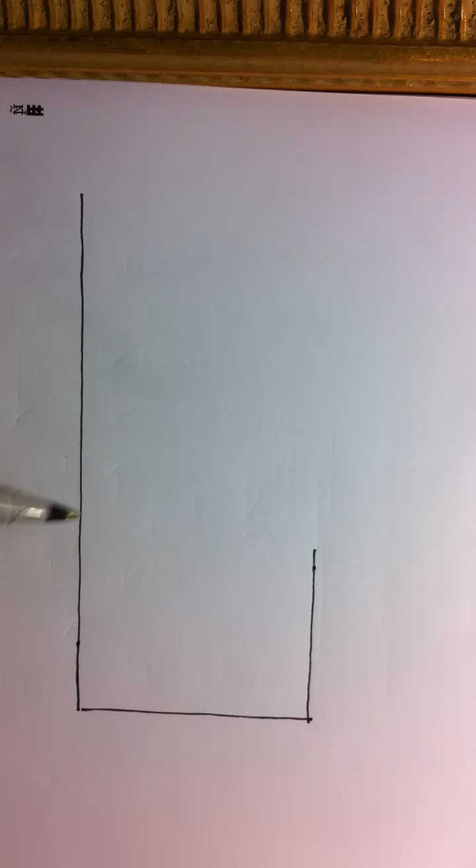Okay, imagine you're given this drawing in your exam. How far down can I go? This is all a bit dodgy, guys. I'm sorry about this, I'm trying to look at my phone, which is stuck on the wall, at the same time as I'm drawing, to make sure I don't go off the page too far.

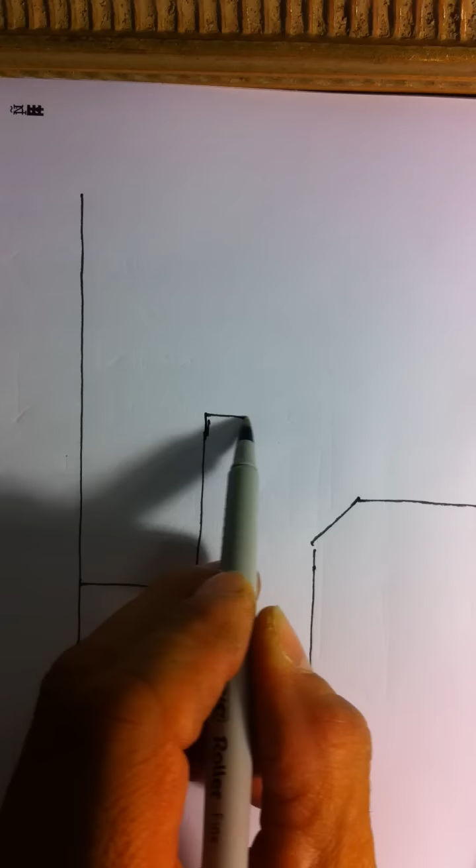There we go. Okay, so we might have an edge beam that looks something like this. Up a bit higher. Something like that. Okay, so you might be given a drawing that looks something like this - your drawing will be a bit straighter than this. Okay, so you're given that.

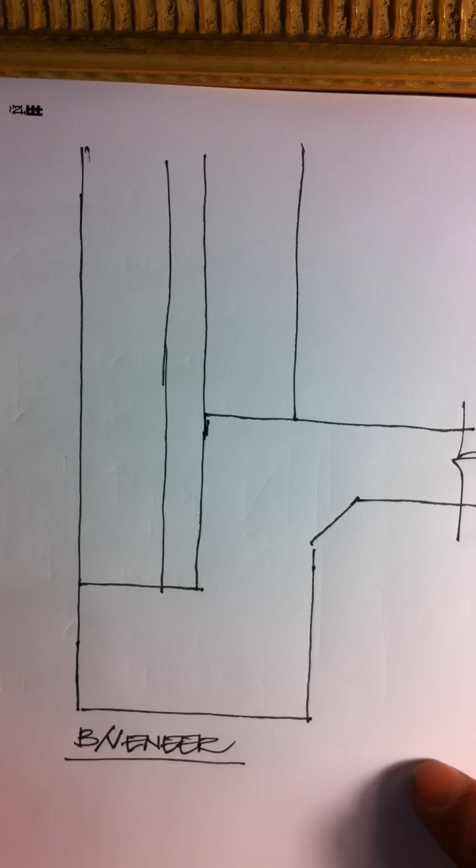And if we assume that's a brick veneer wall, what I'll be looking for you to do in your test is fill in the missing details. Okay, you may not have been given a finished ground level, FGL, and this one up here would be FFL, finished floor level.

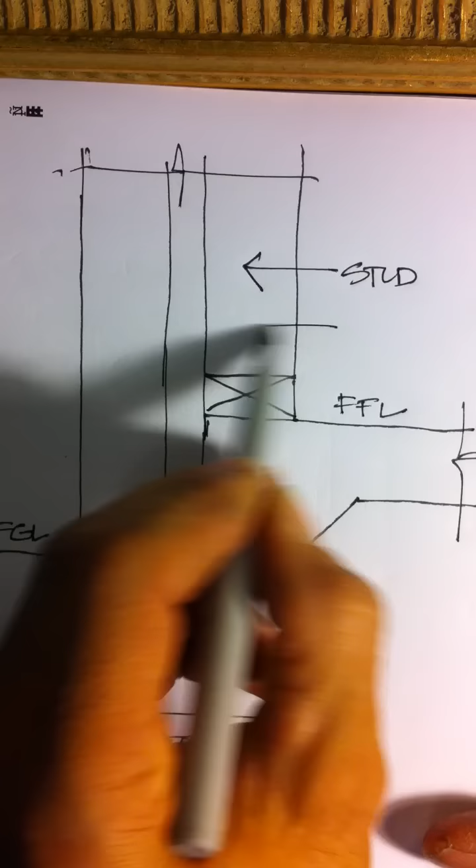If it's brick veneer, the first thing you know is you're going to put in a bottom plate, and this is going to be a stud. And that can be a bottom plate. I'm just going to say B/P.

Reinforcing is placed 20 millimeters from the top, so we should show that 20 millimeter cover. Reinforcing will be shown like this in the bottom of the edge beam.

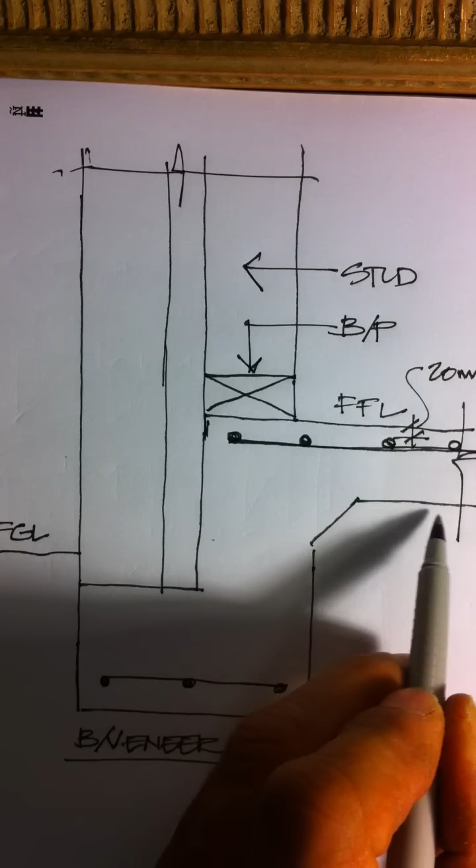And then we will show a vapor barrier. That's the black plastic or orange plastic sheet that's laid entirely underneath the slab. Some councils may permit it to stop there, but any builder with an ounce of common sense will run it all the way around. In really high moisture areas, sometimes it's folded back in here.

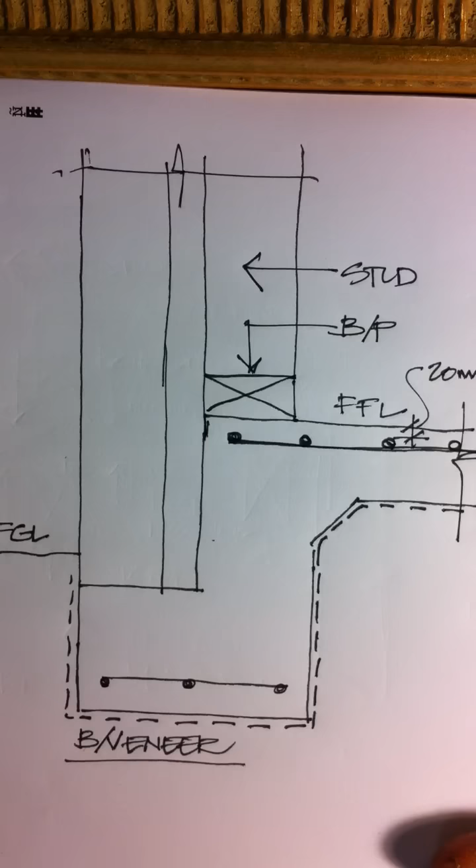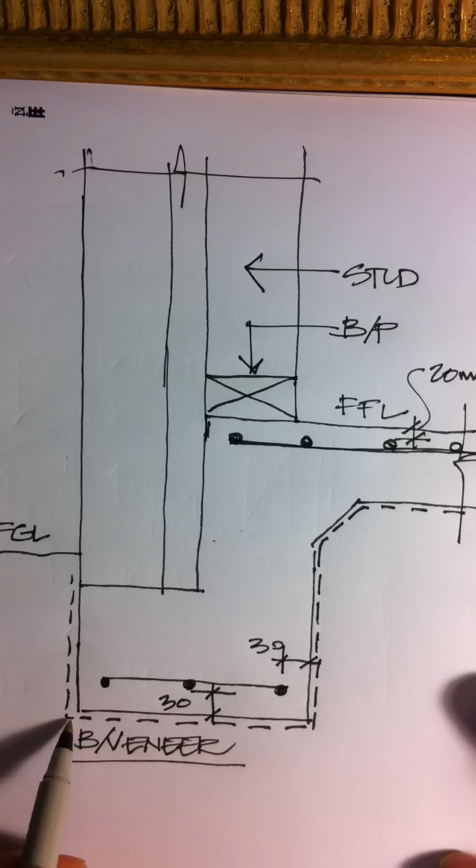Because we've wrapped our vapor barrier all the way around - don't confuse this with the damp proof course, a vapor barrier or membrane goes underneath the slab - we're protecting the steel from excessive moisture coming in, so we can reduce the concrete cover to 30 millimeters. So that's 30 there. If I terminated the membrane here, I would have to have 40 millimeters concrete cover there.

Now we'll move over here and we'll put in our sand blinding layer. I could show that like that. So that's our sand blinding layer. Oops, I've gone off the edge of the page a bit.

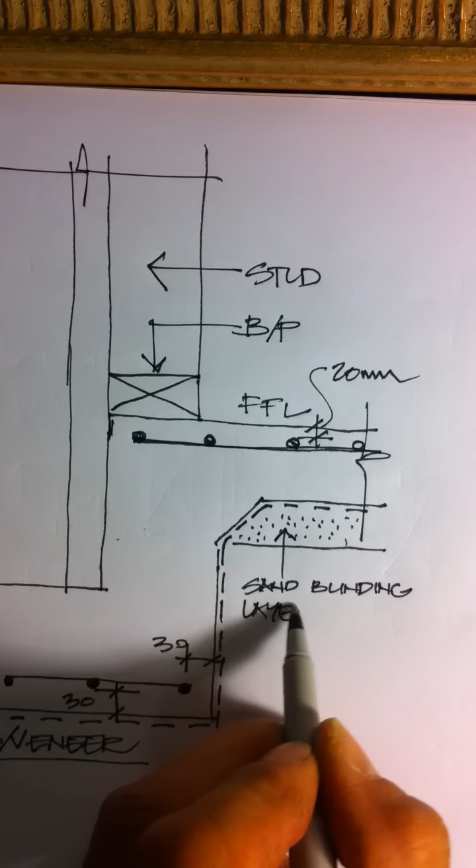That's trench mesh. Sorry for moving backwards and forwards, as I said, first time I've done this. Okay, and I'll just label that as vapor barrier.

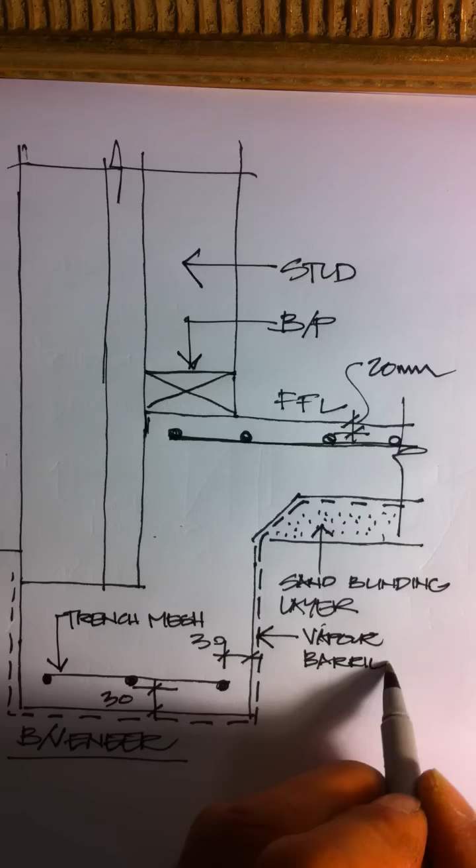Pardon me. Okay, now what I want to do at this point here is there's only a couple of things that are left. I don't need to show all the brickwork. What I could do at a height of some 75 millimeters, I could install Termimesh.

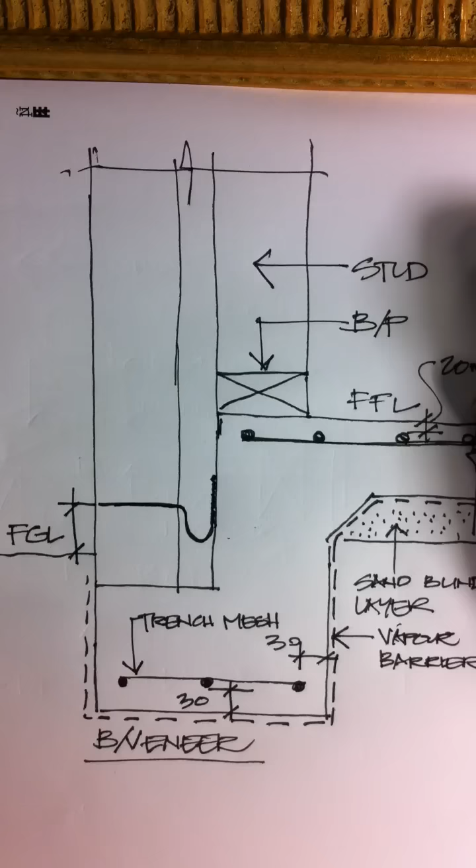Okay, so my Termimesh is parged - that's a special glue, a bit like KFC's 11 secret herbs and spices. So this is Termimesh parged to slab. And that height there, you can just note it like that, 75 millimeter minimum.

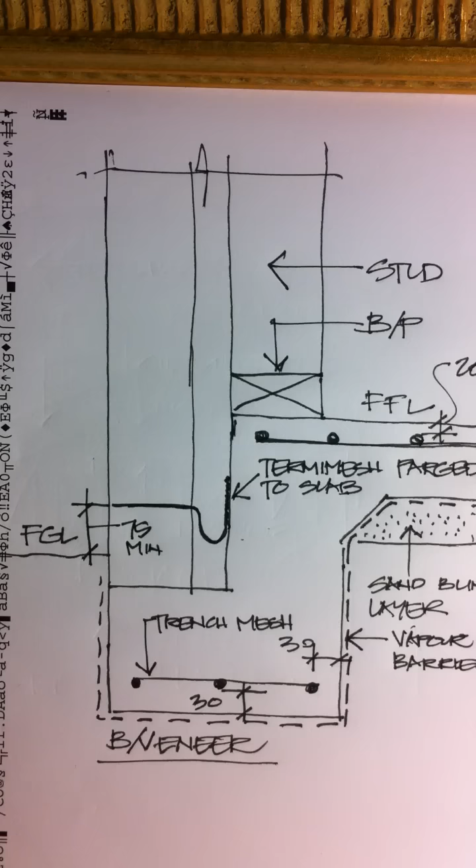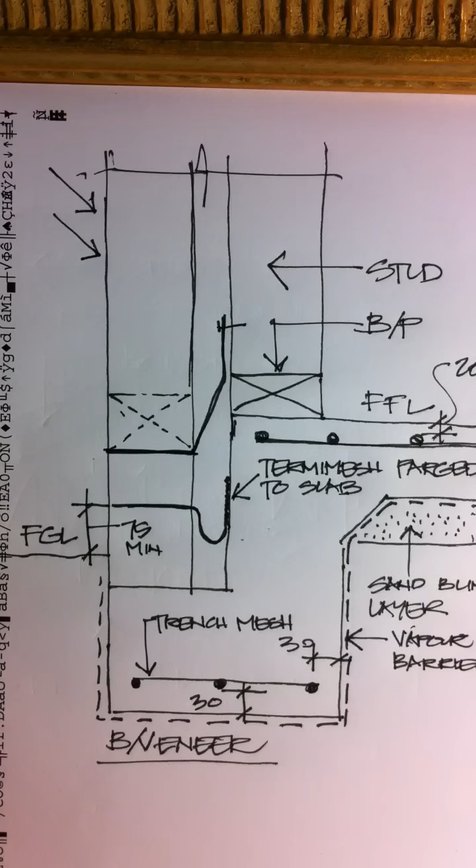Because the inside of that wall can get wet during excessive rain, we need to place a flashing and weep hole. So I'll show that in, say, a brick course above, and I'll show a weep hole as a dashed line. So what I've got here is a DPC and a flashing all in one, and that would be nailed to the stud. I'm running out of room to label this, so I'm going to write flashing and DPC.

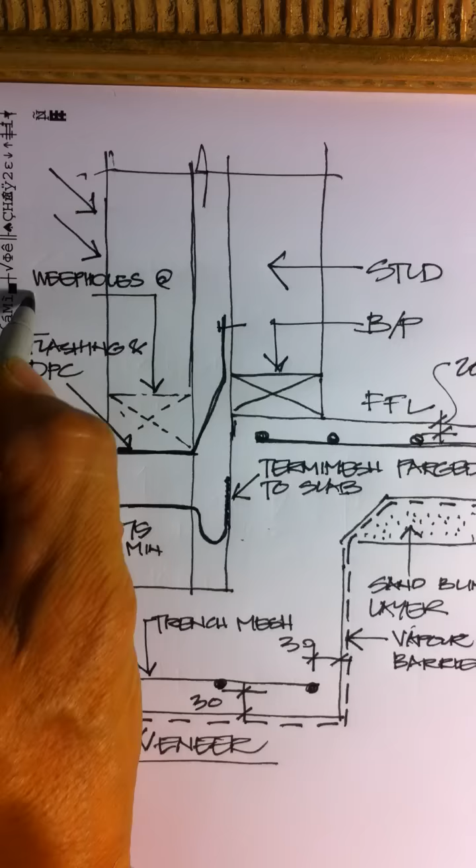I'll put in here a weep hole, and weep holes at maximum 1200 centres. And the last thing that needs to go on this drawing is a veneer tie. So a veneer tie is sort of shown like that, and it bends up and gets nailed off - it's a bit of a bad drawing - gets nailed off onto the stud just like that.

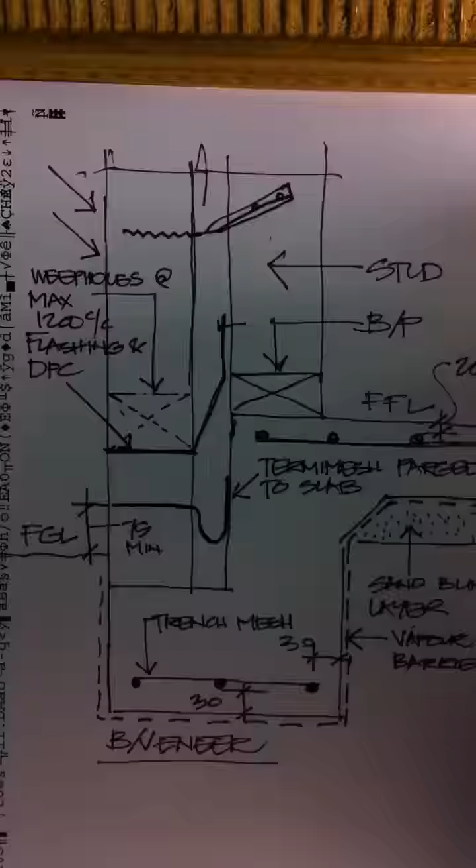Okay, now we'll look at a cavity brick.